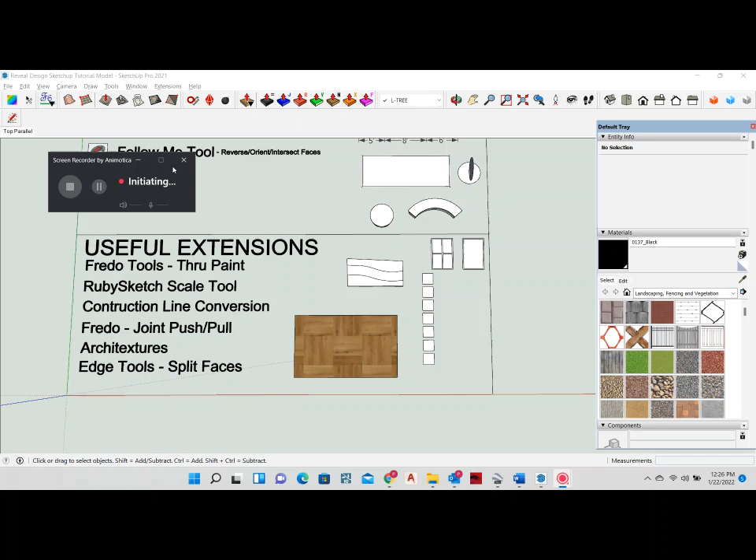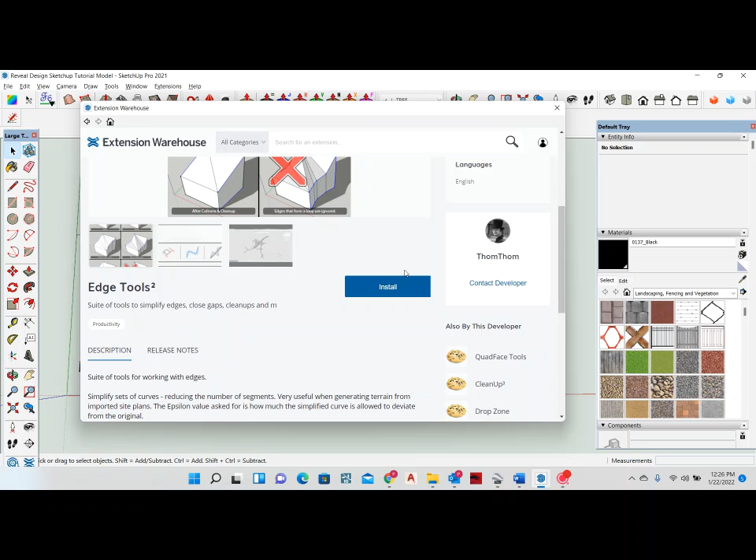The next useful extension we're going to talk about that I use pretty much daily is called Edge Tools. It's called Split Faces by Edge Tools. You can find that in the extension warehouse. Just type in Edge Tools, and it is this picture of a cookie. It's made by a developer called ThomThom. He's done a lot of really great extensions that you can use. Go ahead and install that.

For me, I'm going to right click and open that up. So that button came in right here at the bottom because that's where I typically keep it. That's our Edge Tool button right here. And what you're going to be using is the split faces into multiple pieces.

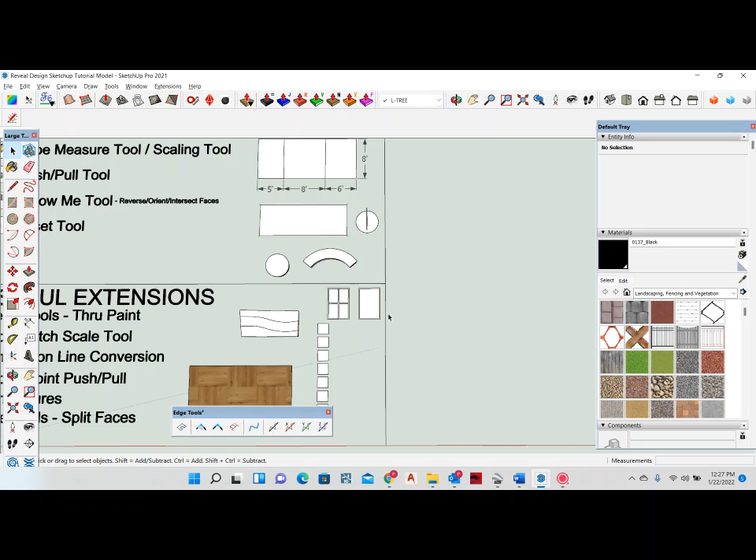Here's how this works. So for example, you've got a window here. The typical way, if you wanted to find those cross beams for the window, you take your tape measure tool, find your spot, hit the midpoint, and then offset that. Say offset by 1 inch here, offset it by another inch, and do that again. Find your midpoint, offset that by one, and then if you take your rectangle tool, you can put all of this together, then your erase tool, and that gives you your window.

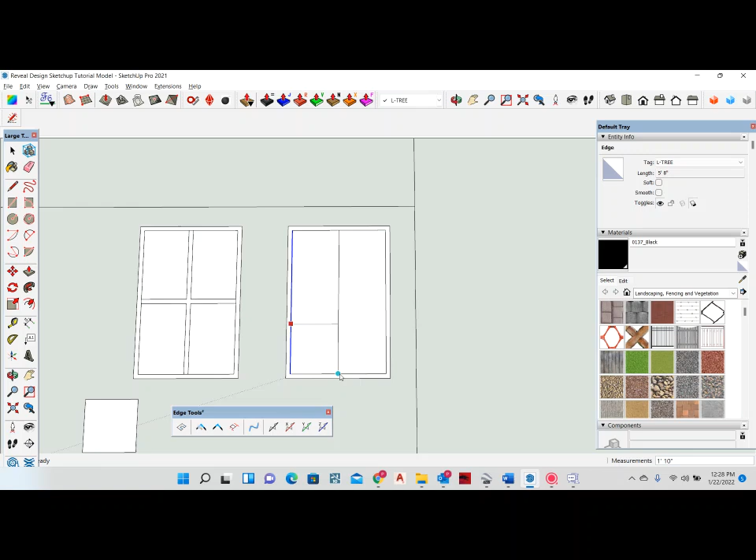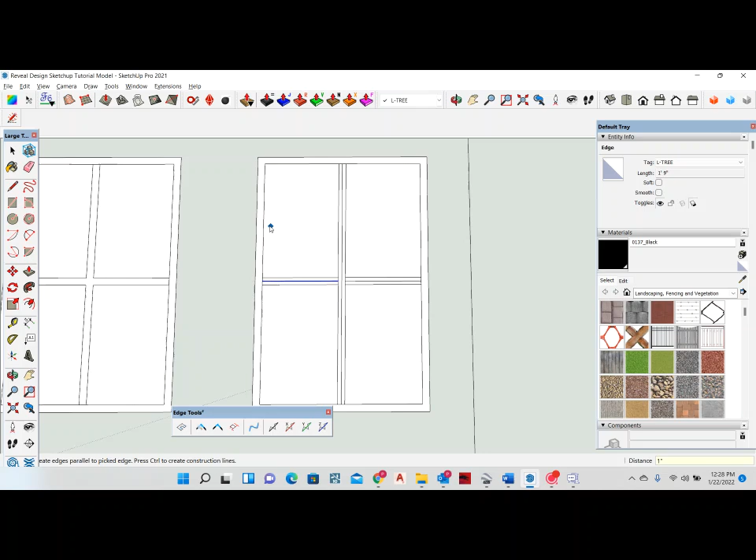Well, the other way to do this without having to use that tape measure tool is Edge Tools. So if you just click that button, you can grab your line and bring this out to the desired distance that you want. There's one right there, we bring it out to one, bring it out to one, and then go ahead and bring these down as well. So you find your midpoint, one, find your midpoint, bring it out one, and then just go ahead and erase the extra lines that are in there, just like that.

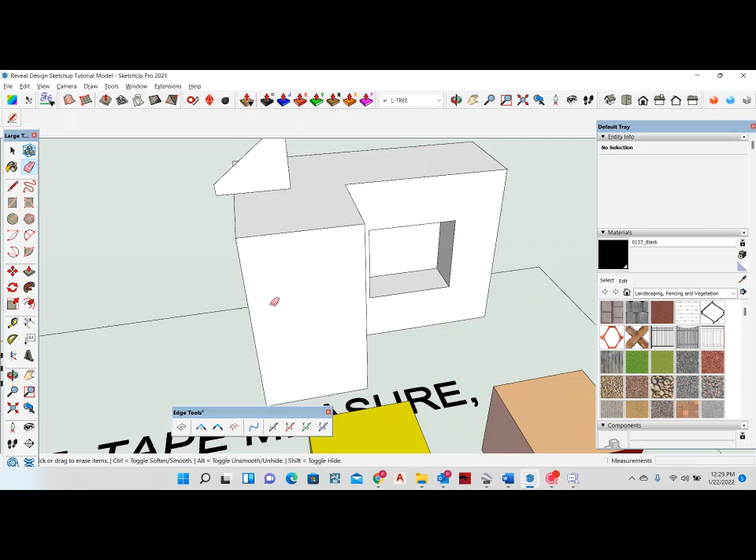The amount of steps that you're saving, a little bit more, I guess it's pretty close, but where it does help too in other scenarios would be, maybe you have some siding with a band that goes straight up on a wall like this. Instead of doing your tape measure tool, let's get into this.

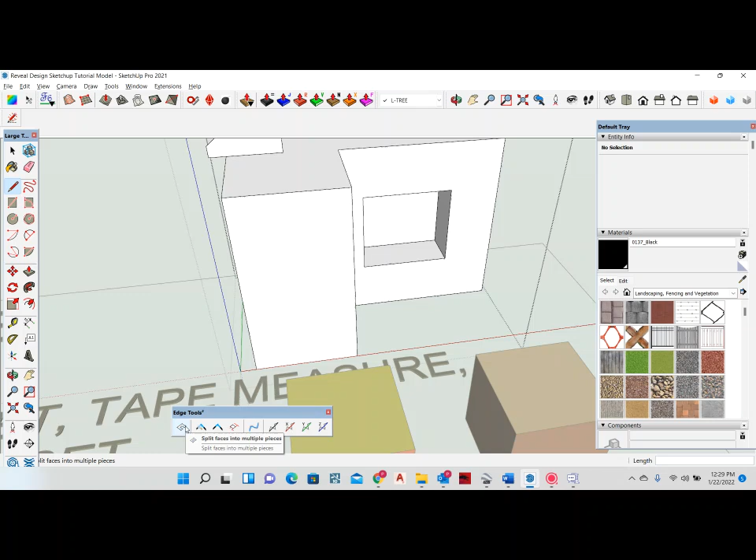Here's what you would normally do: you pull this out, maybe that band is 4 inches, so we're going to go 4, enter. And then we're going to grab our line tool and take this and grab our spot, bring it all the way up. So here's another way to do it. If you just click that Edge Tools, which split faces into multiple pieces, you can grab that line and just pull it out 4 inches. So it does save a step from having to use the tape measure tool all the time.

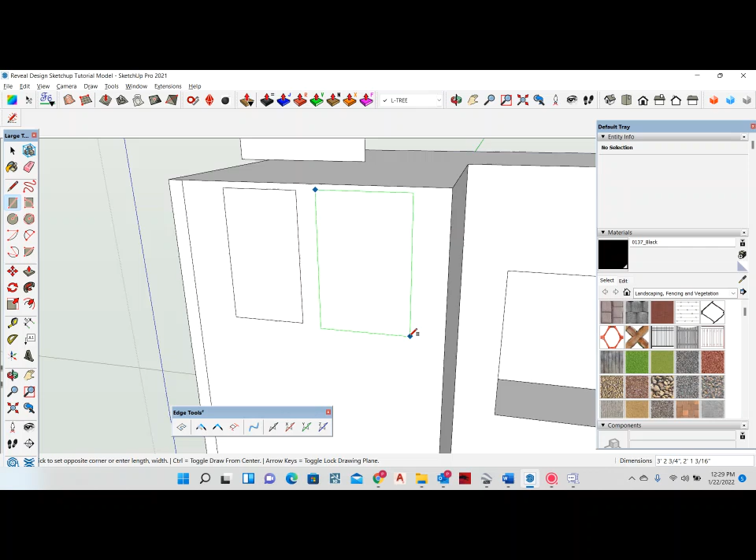Play with it a little bit. Yeah, sometimes it doesn't exactly get everything that you want it to. For example, if we had a window here, this is actually a pretty good example. Let's say we had a couple windows right here, and then we're going to go ahead and split this down 4 inches. You can see that it's kind of cool because it still continues on over this way. So we went 4 inches down, we still have it going through here, but it wouldn't cut through this window area. So again, it depends on your use of it and what you want to do, but that's how that tool works.

Really helpful. I do use it all the time.